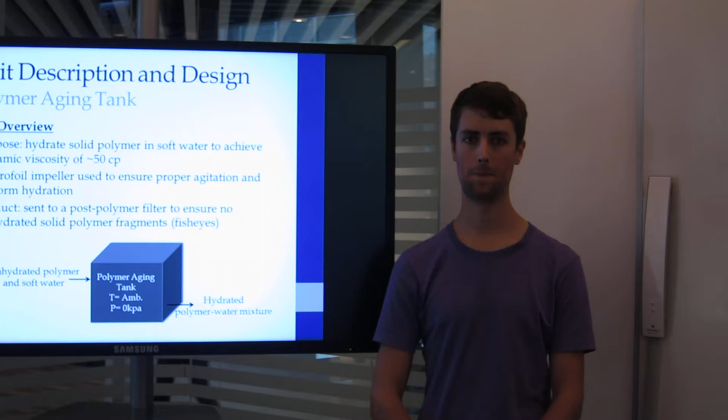My name is Max LaFortune, and today I'll be presenting my part of the Alkaline Surfactant Polymer Flood Design Team project, which is the polymer aging tank.

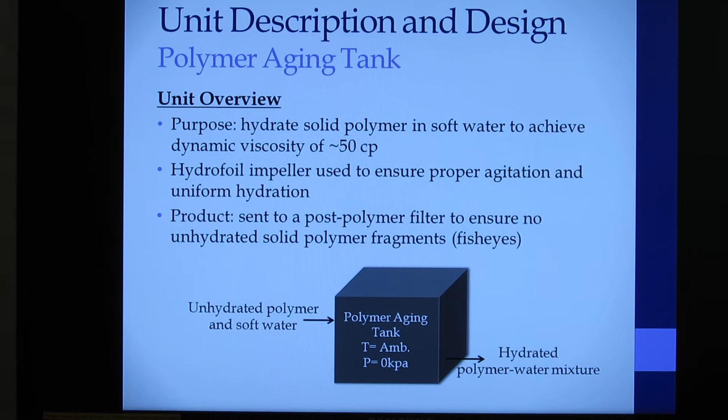The purpose of the polymer aging tank is to adequately hydrate the solid polymer using the deoxygenated soft water, which comes from the polymer volumetric feeder. A hydrofoil impeller was chosen to ensure proper agitation and hydration, as well as to minimize shear rates so that the polymer doesn't break up.

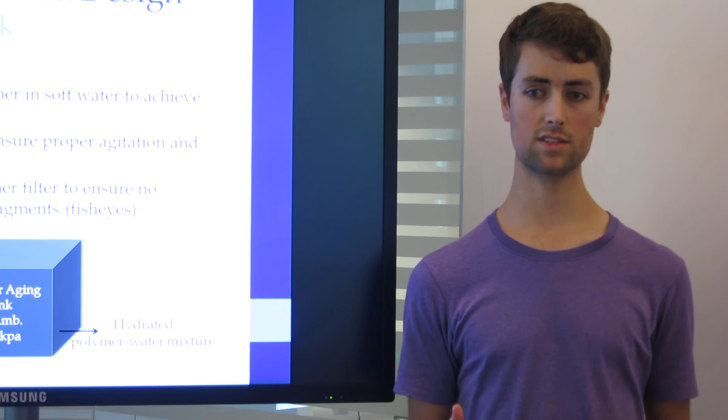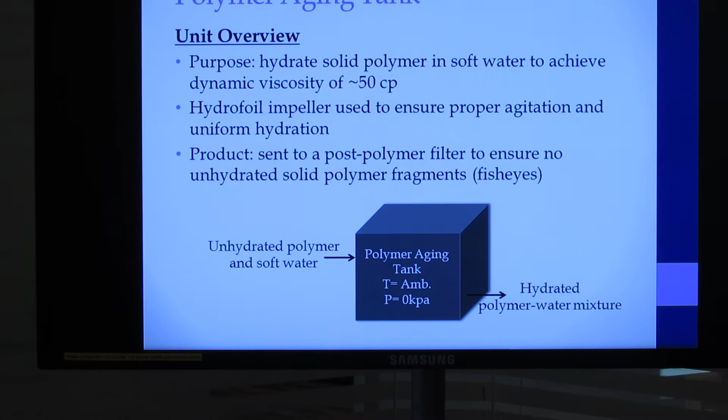The product is then sent to the post-polymer filter, which is used as a precautionary measure in case any solid polymer pieces or fish eyes remain in the product stream, which would then be filtered out. The polymer aging tank operates at ambient pressure and temperature, which makes it ideal for energy efficiency.

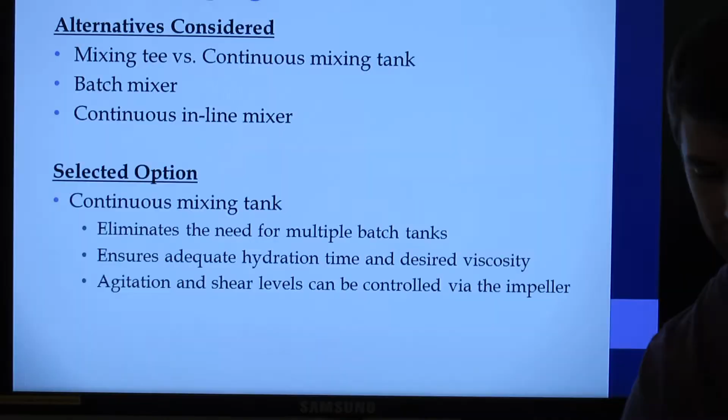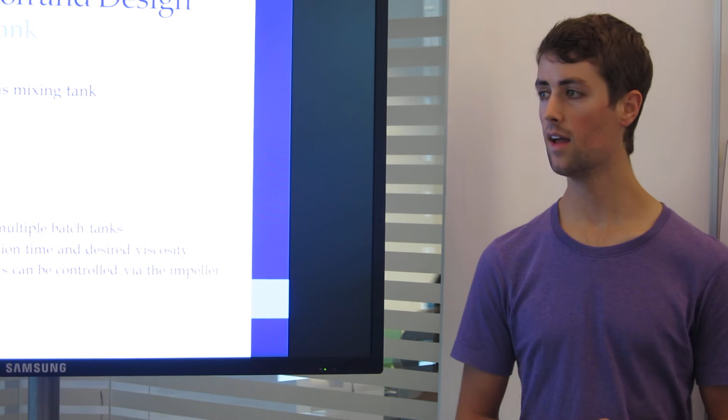For the polymer aging tank, there are a few alternatives considered. First, I considered a mixing tee versus a continuous mixing tank, as well as batch mixers or a continuous inline mixer. The mixing tee was discounted because it was seen as not able to achieve the adequate hydration and uniform viscosity necessary, whereas batch mixers, although a viable option, would require multiple mixing tanks, and thus the capital cost would likely be increased.

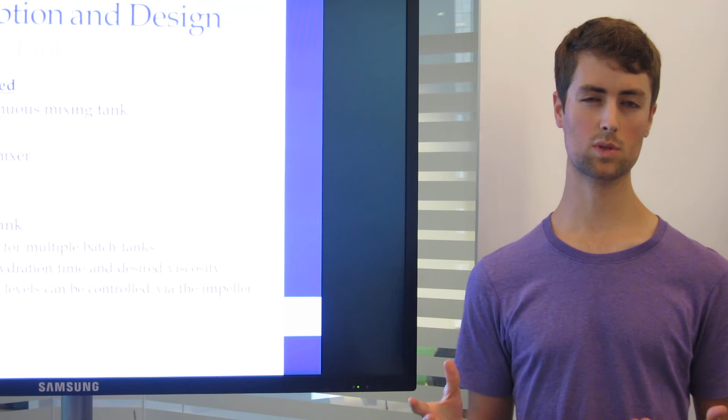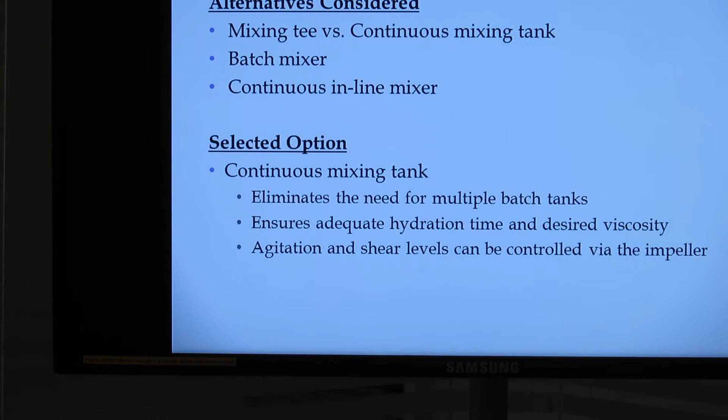Finally, a continuous inline mixer would require a very long length, as well as a very highly turbulent level of fluid, in order to achieve the adequate hydration. Those were limiting factors for that choice. As a result, the continuous mixing tank was chosen, which eliminates the need for multiple mixers and allows proper hydration and agitation to be achieved while minimizing shear rates using the appropriate impeller.

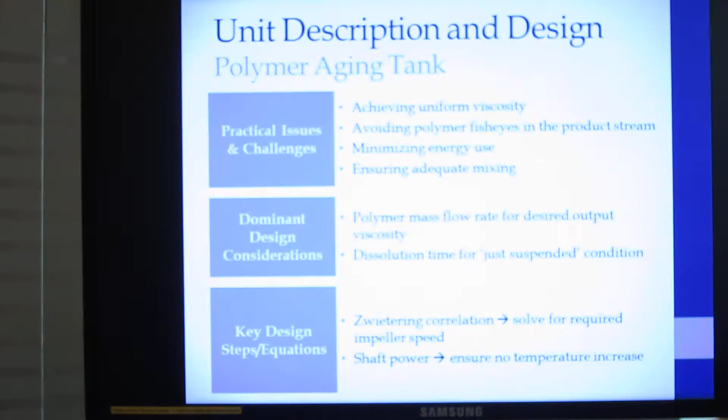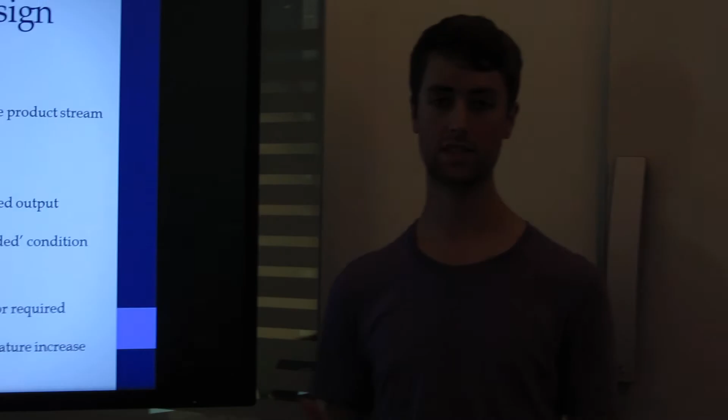Some of the practical issues and challenges that needed to be addressed: first, making sure that the appropriate and uniform viscosity was achieved was very important. Also, avoiding polymer fish eyes as much as possible in the product stream was a key consideration. In addition, minimizing energy use, as well as ensuring adequate mixing took place, were also key considerations.

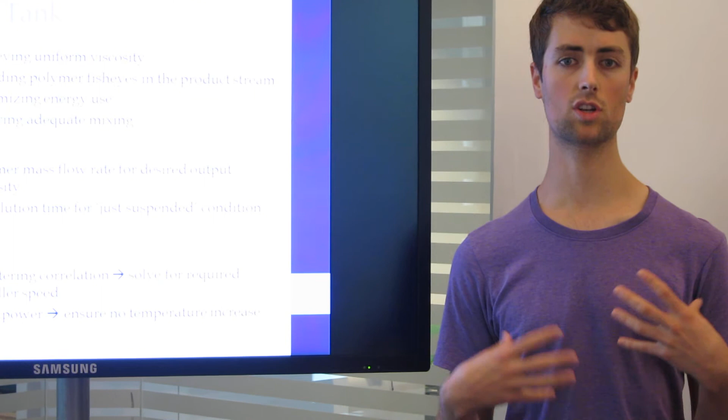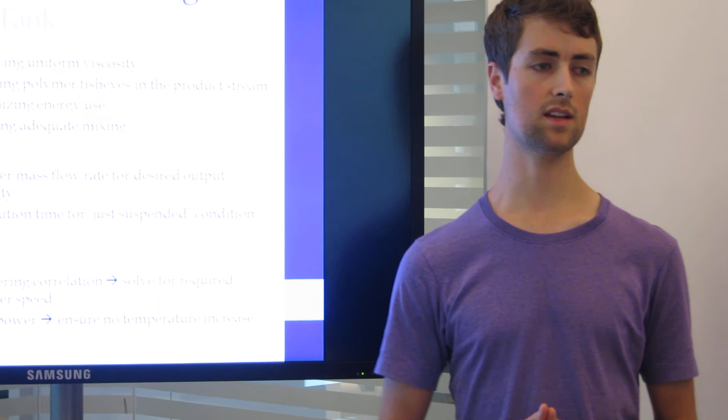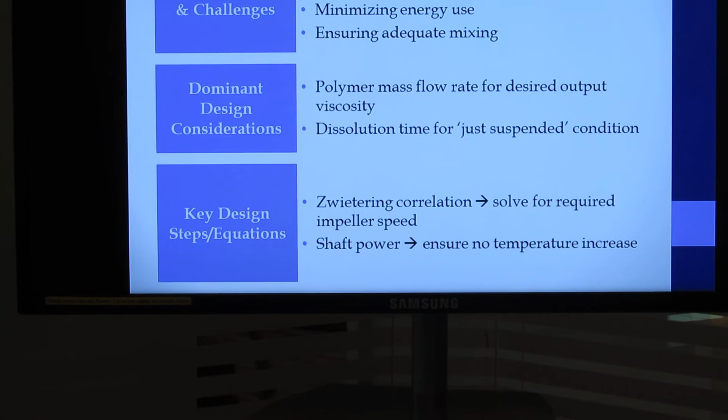Some of the design considerations were what the polymer and mass flow rate into the tank should be to ensure the proper viscosity, as well as the dissolution time required for the just suspended condition, which was required for this mixing to take place. Some key equations and considerations were the Zwietering correlation, used to solve for the impeller speed, as well as the shaft power, which could be checked to ensure that heat was not building up in the tank, which would create dangerous conditions.

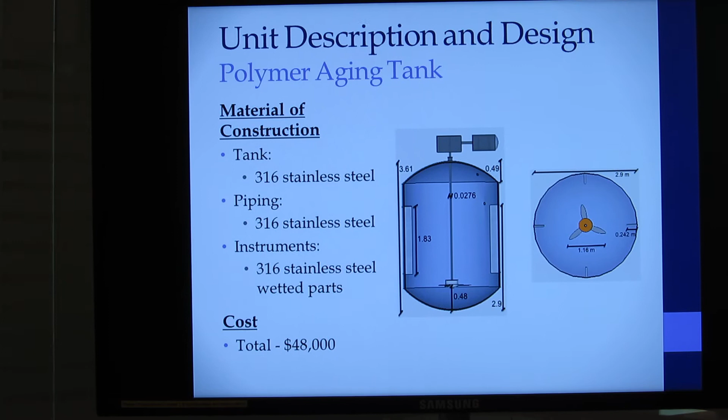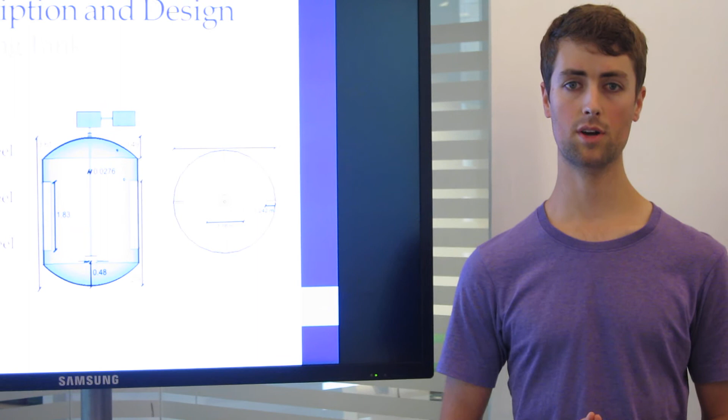For this tank, as well as its wetted parts and pipes, 316 stainless steel was chosen as the material of construction. It was chosen as it's an industry standard for strength and durability, and though the deoxygenated water will be coming in, it's also very corrosion resistant, so it will last longer. Using a correlation from Peter's design handbook, the cost was estimated to be $48,000.

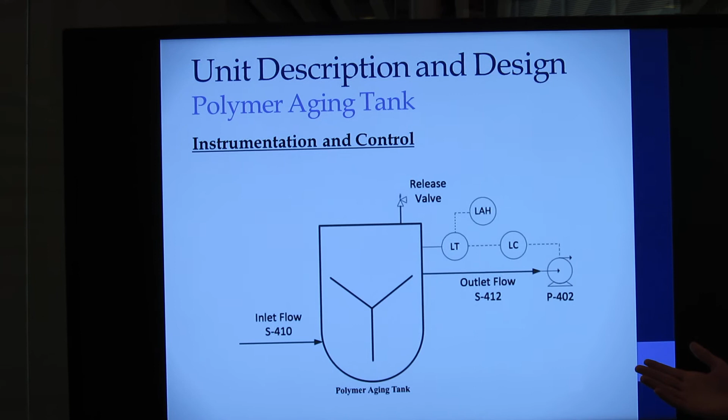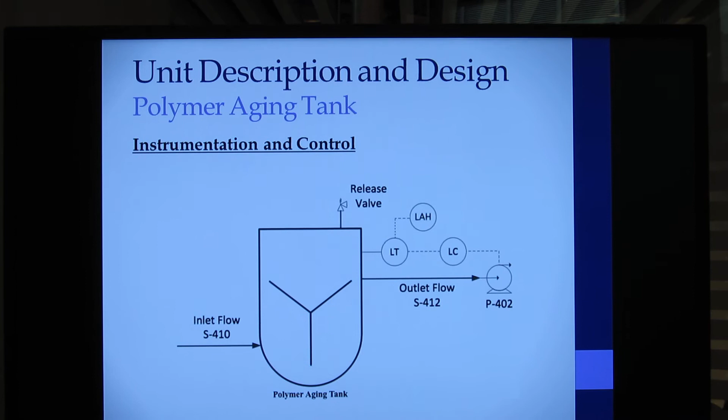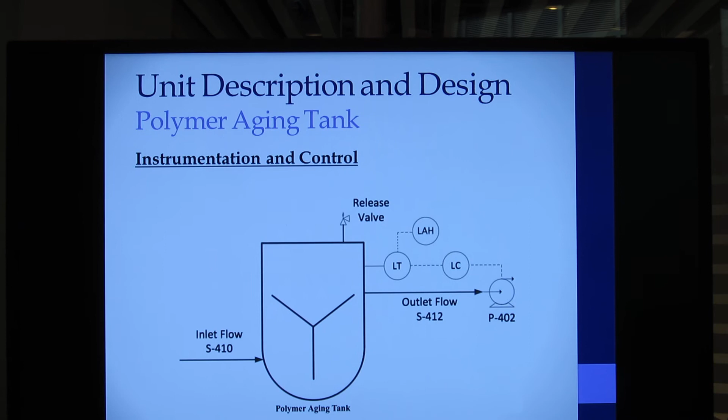As you can see from the piping and instrumentation diagram, safety was a key consideration in the design of this tank. Here we have a level controller, where a digital signal is transmitted from the level transmitter once the liquid height in the tank reaches 2.9 meters. This then allows the outlet flow to flow out of the tank and ensures that 2.9 meters is maintained as the constant height in the tank.

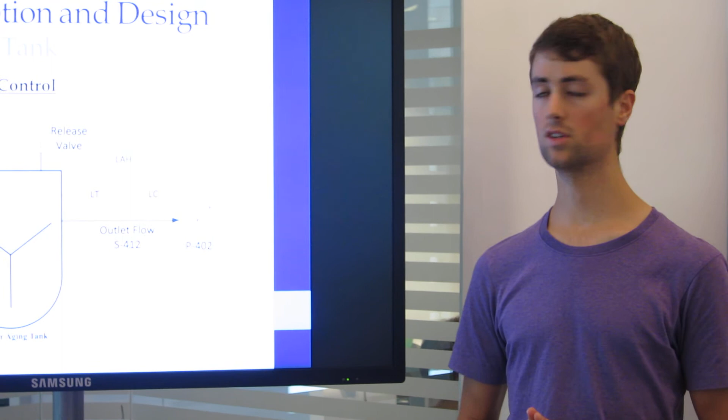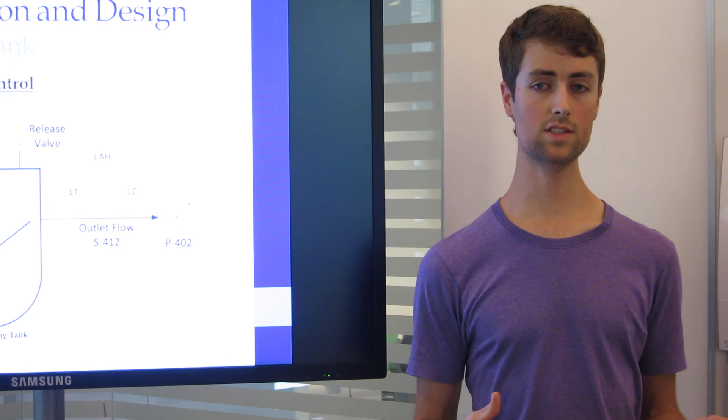Because safety is such a key consideration in this tank, however, due to its high volume of water and polymer mixture, there were a few additional safety measures put in place. A critical alarm in case the liquid height reaches above 2.9 meters was put in, as well as a release valve, so that if all else fails and the tank liquid level reaches the top of the tank, the components will be allowed to flow out of the tank and thus not build up pressure inside.

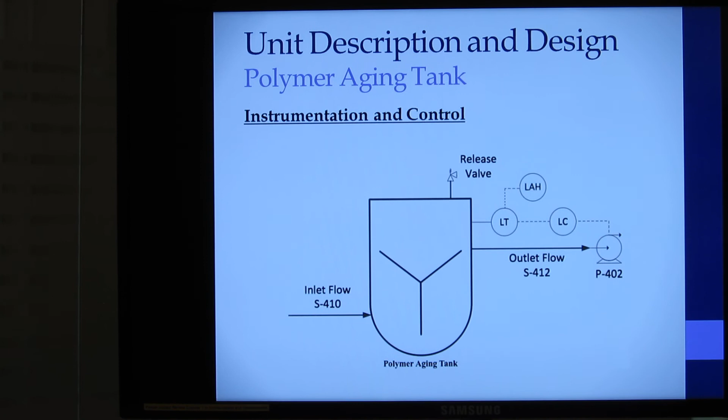So, as you can see, this is an innovative design for this tank that will maintain safety and proper hydration of the polymer.